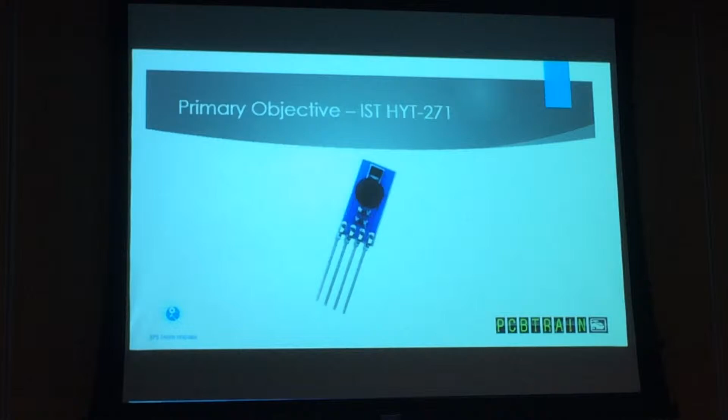This also measures temperature, and that allowed us to get an on-board temperature reading. To get a temperature reading of the air itself, which we felt might be what you were interested in, we had a second temperature sensor. This is a hygrometer, actually, the IST HYT271, another Swiss-made component, in fact. And this measures temperature and humidity. It is a reliable chip for the latter, which is somewhat rare. It's also factory calibrated and very compact.

If we have a look at the graphs we obtained from these data, you can see on the top graph internal and external temperature. The blue line on the top is the internal temperature, as you might imagine, and you can see that there is quite a nice correlation between the internal and external temperatures. There is some smoothing in the top line because it was more deeply integrated with the electronics. You can see the little bumps just to the left at about 1,000 seconds in, if you look at the x-axis of time on these graphs. Those, we believe, were where the CanSat was put into the launch tube itself.

And then, interestingly, you can see a reasonably flat section for the entirety of ascent, which we believe was because all of the sensors were shielded by the launch tube assembly. Then, if we just skip to pressure for a moment, you can see a nice gradual decrease, which is much what one would expect with an increase in altitude, until suddenly at about t equals 1800, you have a very rapid descent. This, in fact, was possibly too rapid. If we have a look at the top graph, you can see the sudden drop in temperature as the components are once again exposed to the outside air, and they have their cooling air flowing through them. And then, especially with the top blue line, you can see a gradual increase once again as the electronics start to warm things back up.

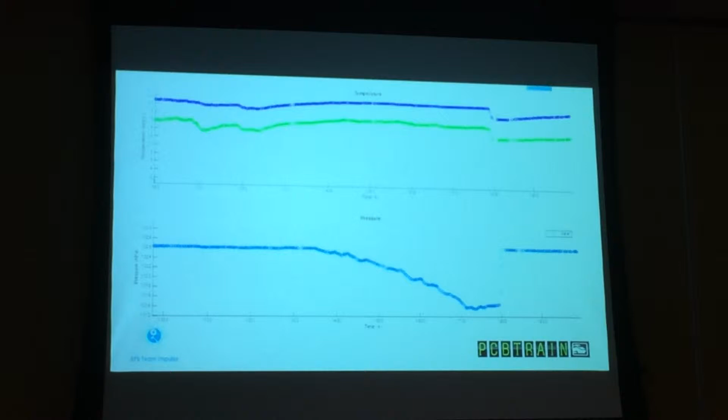On the bottom, we have a pressure drop, much as one would expect, and since, as we will come on to in a few minutes, the parachute unfortunately failed to deploy correctly, this was an especially rapid descent. In fact, I don't have an altitude time graph in this presentation, but I plotted one, and according to my calculations, it was descending at much nearer 20 meters per second than 10 before it hit the ground, which was, shall we say, not ideal.

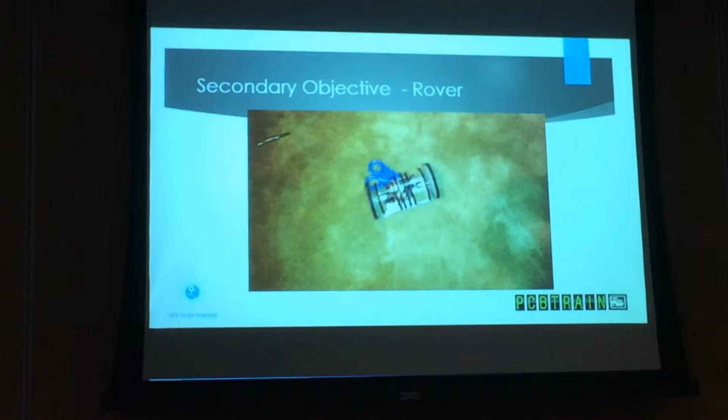Our secondary objective was a rover, which, as you can see, this early prototype worked fantastically and could overcome all sorts of stationary obstacles. Almost managed carpet.

So the idea with the rover was it would be a radio communicating rover. It would be able to navigate autonomously to WGS84 coordinates or OS grid references, and it would relay all sorts of data back to the ground station, including temperature, pressure, and humidity.

On the note of humidity, indeed. Now you may recall that earlier I mentioned humidity. In fact, we measured that using the external temperature sensor chip, which I mentioned earlier, and the objectives with this were to calculate and investigate the dew point, that is, the temperature at which water condenses out of the sample of air at a constant pressure.

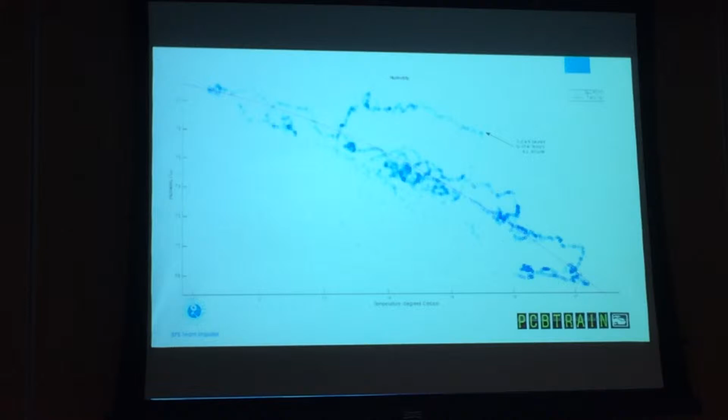Because as one increases the temperature, the capacity of the air to hold water increases. The relative humidity is calculated as the partial pressure of water vapour in the air over the total potential partial pressure of the air. So if the water volume remains roughly constant, that's what one would expect. The wild fluctuations you can see there are because these readings would have been taken at different altitudes and at different pressure levels. So that I felt was quite satisfactory data.

Moving on to the electronics, I'm going to hand you over to our head of electronics. Thank you. Since we had a number of different logic levels running on the board, we had two separate power supplies, 3.3 volts and 5 volts. We're running off a lithium polymer battery, which has a nominal voltage of 3.7 volts, so obviously 5 volts is a bit difficult. We used a boost converter, which simply ups the voltage of the motors, and a low dropout regulator to power the microcontroller itself.

We considered using a switching regulator, which might have been more efficient, but because we weren't worried about power consumption too much, it was not a great concern. This provides a nice stable power supply, which is good when you come to our next section, which is the microcontroller. You can see on the left there the Teensy 3.1, which is the board we used. It is an ARM-based microprocessor board, and it is, as the name suggests, very small. It comes with all of the programming circuitry on it.

In other words, you can program it over micro USB and you can get data back from it over micro USB. And that is invaluable if you don't want to have to use JTAG programmers and so on, which you would if you had a standalone ARM chip. Finally, the motor driver, which you can see on the right there, was the DRV8833 PWP, as mentioned in the report, which is an H-bridge driver in a very small surface mount package.

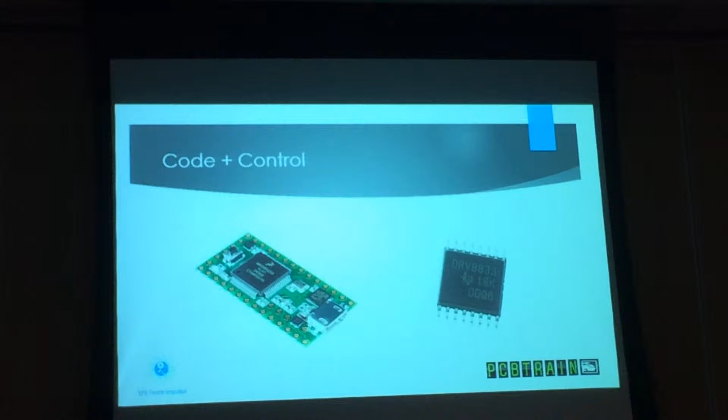But first, a little diversion on the excellent parachute. The parachute was calculated by another team member who couldn't be here today; we established that for a terminal velocity of 10.4 meters per second, all we need is a parachute of 50 centimeters in diameter. Unfortunately, it appears our parachute doesn't have sufficient depth or enough of a dome in order to slow down the descent, so we end up travelling at about 50 meters per second, I believe, was the calculated value. Sorry, just to correct that, 15 or 20 meters a second.

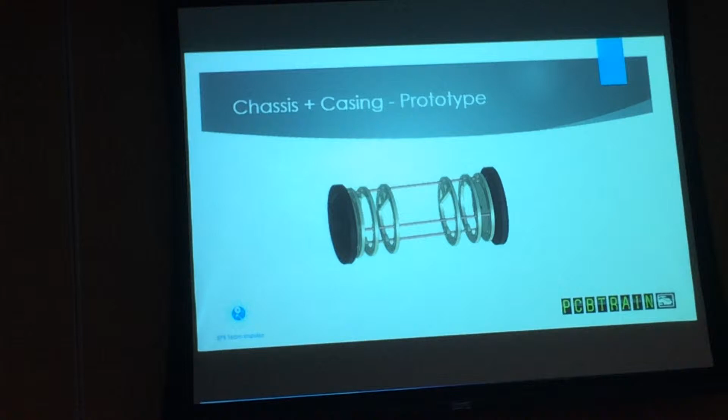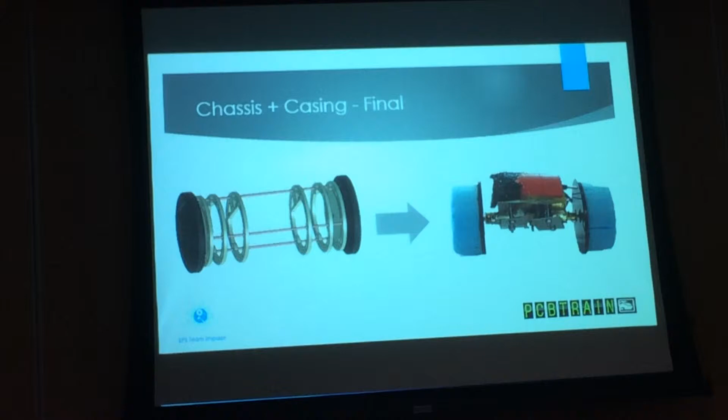However, during testing, as you saw, the problem was it would get caught. So we realised we had to increase clearance. Now, we made some minor changes, and what we did was basically cut off half on the inside. We also changed the wheels. We mounted an aluminium dome onto an aluminium plate with a strut release system bolted on the bottom, as well as the motors, and then reinforced with more aluminium. The whole idea of this was increased clearance so it could tackle grass and inclines, which was a problem previously.

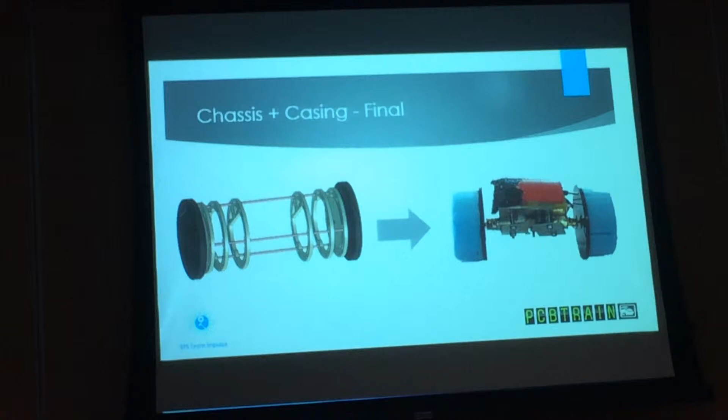We also realised at this point that the weight restriction, our final design weighed under 250 grams, so we realised the weight restriction wasn't really going to hinder us all that much, so I decided to make it a 2 mil thick aluminium plate, just in case, as happened, the parachute didn't work. It survived fine. It was basically unscarred, which is great.

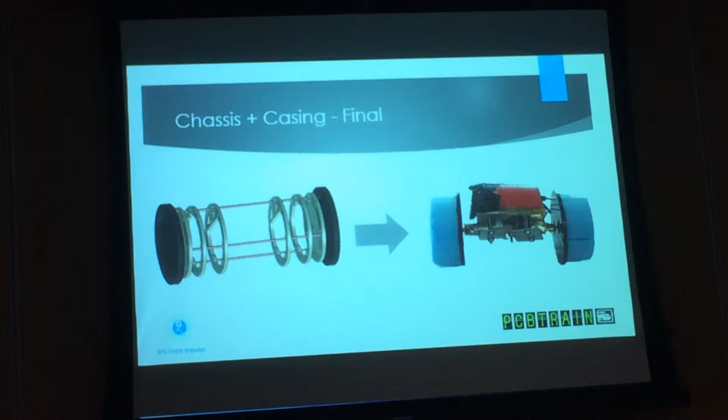And in order to meet that specification, we ended up, in fact, having to put quite a significant quantity of lead shot into a bag attached not to the parachute itself, but to the cord running from the parachute, which allowed us to increase the mass of the CanSat to meet the specification almost exactly without compromising the design or space in the CanSat itself.

On the note of the parachute release system, in order to avoid the parachute getting entangled in the wheels of the rover, we had a linear servo motor controlling a pin release system for the parachute, so that upon command it could release the parachute and therefore the rover could drive away unhindered. This worked perfectly on the day, and the parachute landed clear of the rover, and the rover was able to move independently.

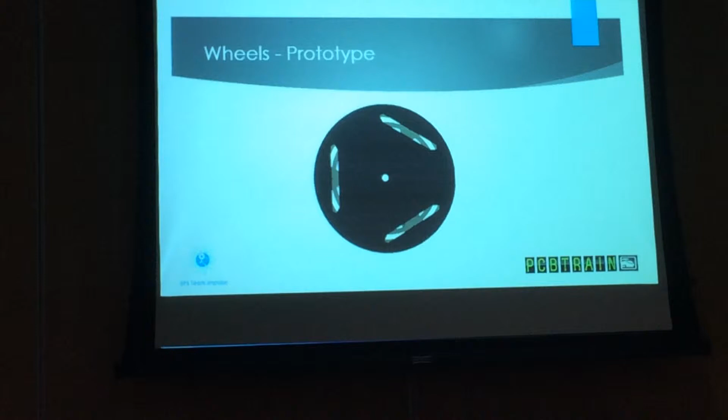The wheels, yes, this was my wheel prototype. I was going to use rubber on the basis that with the chassis being of a 64mm diameter and the wheels 66, on impact the rubber would compress slightly to allow more of the chassis to take the pressure if it landed flatter on that angle. However, it didn't work, was the problem. We couldn't key it properly because the motors are keyed in a D shape and the rubber just wouldn't hold it. So the rubber wouldn't hold as the motors spun, essentially screwing our design.

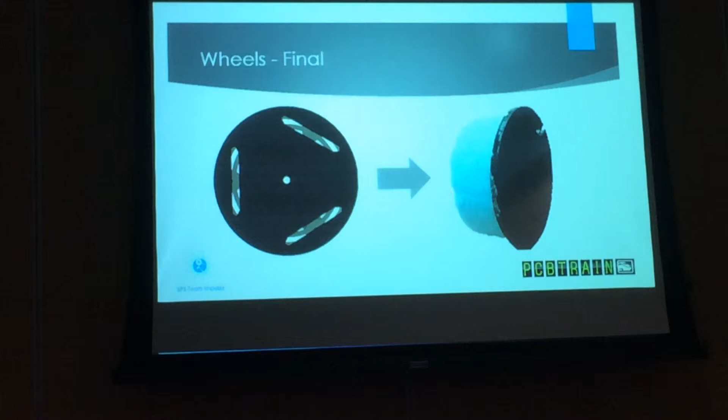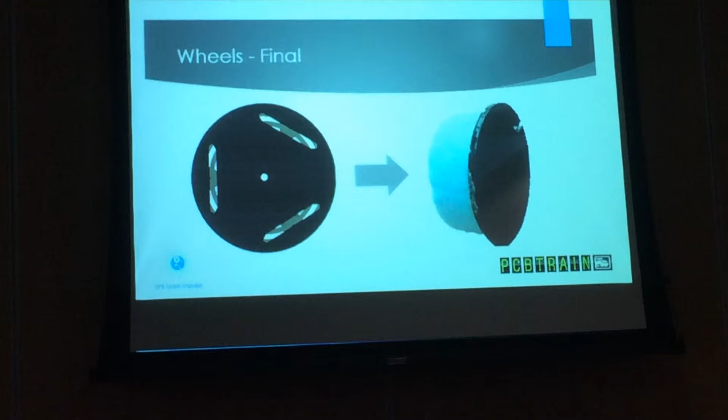So instead we changed to acrylic wheels, which hold the key perfectly, and added foam on the sides to add grip on grass and inclines. It also didn't add too much weight. As you can see on that picture, we do have the strut mechanism in the very right-hand corner of the wheel. This was inbuilt into the bottom of the aluminium frame, so the strut could be released using a spring perfectly on time with the spinning of the wheels. This was to balance it as it moved, because as you saw in the program, one of the major problems was the middle would spin and the wheels would just keep going back and forth without any direction. I think that's my bit done.